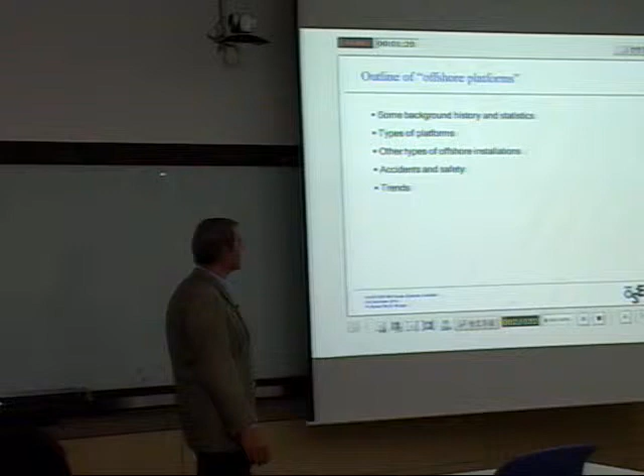I'll give you a little bit of background, and of course the driver - we often talk about driver, what's pushing the development - and the driver, of course, is the need for energy. So we'll have some statistics about energy and how that is evolving and how that is being projected for the future.

We're going to talk about types of platforms and other types of offshore installations. And as usual, I will focus on safety as a very, very important aspect, and a little bit about trends and the future.

So I think the oil history goes back to the 1850s and so on, when they found out it was possible to burn that black liquid that was found in the ground some places where it came up naturally. So the oil...

mainly started on land, but of course gradually moved towards shore. And for instance, in the Gulf of Mexico, very much of the oil deposits are associated with the Mississippi River Delta that goes far out into the ocean. So gradually one had to go into the sea in order to find more oil.

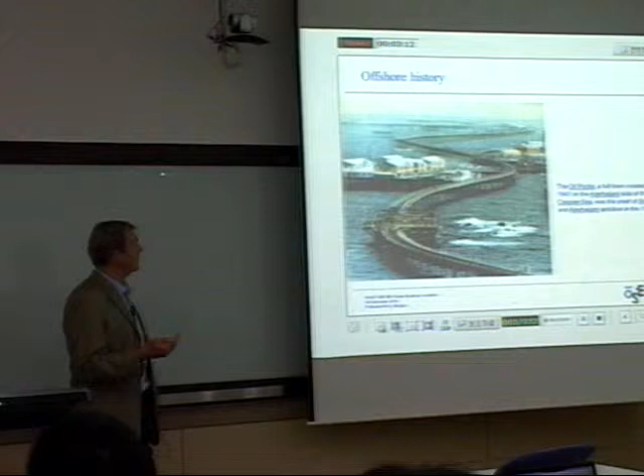And similarly, other places where the oil was very close to the surface, like in Azerbaijan and the oil capital Baku and so on, they gradually moved into the ocean to find the oil, but not very deep into the ground.

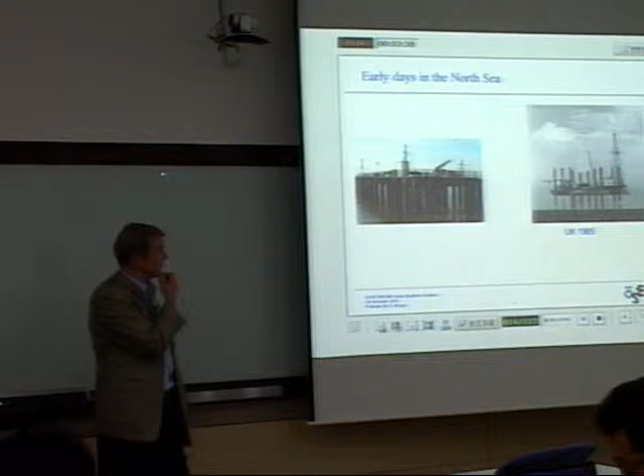And of course, in the Netherlands and the UK, the oil and gas history started in the North Sea. So very primitive platforms in those days, and typically in shallow waters, right? So when you have shallow waters, it's much easier to build structures.

And the challenge that we're going to talk about today and next week has very much to do with the challenge of going into the deep ocean.

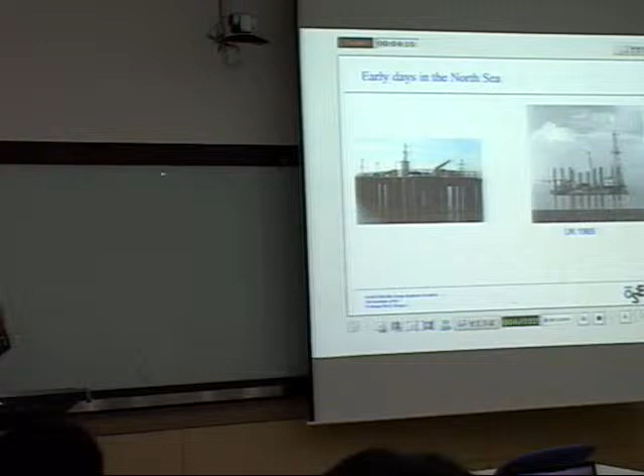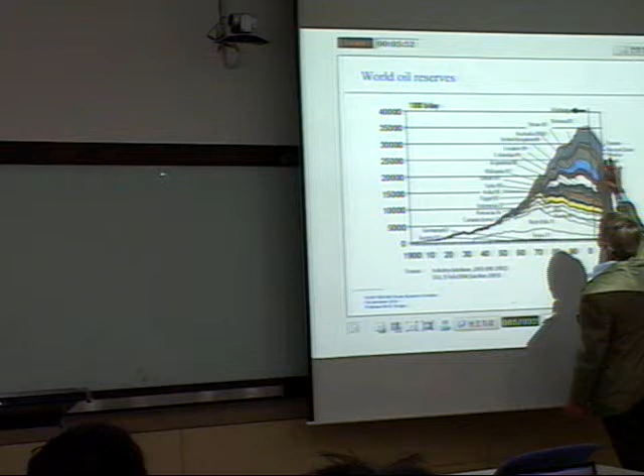Yemen, it should be - Oman, but of course the United Emirates and Saudi Arabia - it must be here. Saudi Arabia is low - where is Saudi Arabia? There is no Saudi Arabia.

Mexico, I don't know - that's a good observation. Texas, Alaska. Okay, well you have to - that's a good observation, so we have to figure that one out.

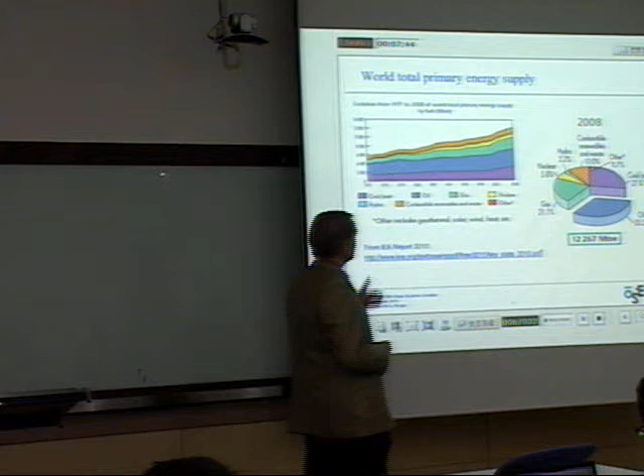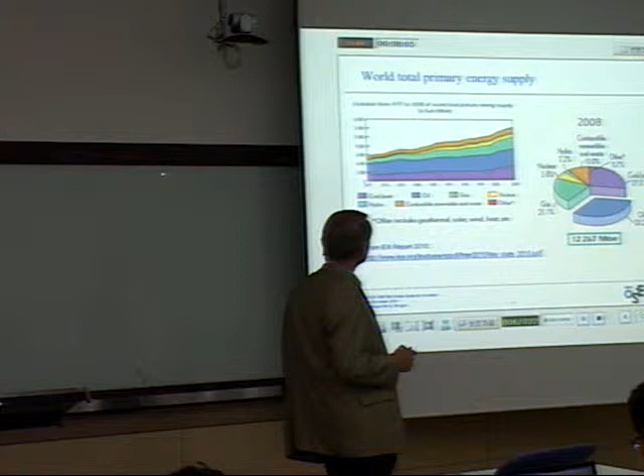But this graph shows the energy mix. If you look at the total energy supply - I should get my pointer - the total energy supply, and it's coal, hydro, oil, gas, nuclear, combustion, that's wood and waste. And you see oil is about 33% and gas 21%.

So oil and gas together is 54%. And then you have coal, which is the large piece of this cake, and nuclear less than 6%, and so on. This is typically firewood and that sort of thing.

And what is interesting also is that there is the renewables that are not wood, the other renewables, which is 0.7%. And what is that? Geothermal, solar, wind, heat, etc. 0.7%, that's as far as it's come.

Of course, there's a lot of attention to that topic of solar energy and wind and current and all that, but it really does not yet matter very much in the energy picture.

So what comes to my mind is, if we were able to be more efficient in our use of this and use less of it, the environmental effect of that would be much greater than what we at present can obtain here. So even with a 5 to 10% growth in that sector, it's still going to be very, very small for many years to come.

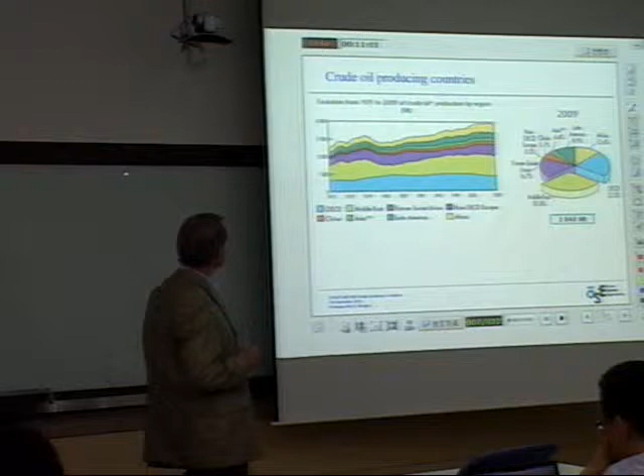Maybe you can convert that other graph to the same units as here, so this is million tons of crude, right? And here you see OECD countries going down, Middle East, former Soviet Union, etc. So Africa is increasing, right? So you see how that is shared more in detail for year 2009. This is very, very recent statistics.

Yes? What is the Organization of Economic... it is, let's say, the developed part of the world. So it's Europe, but I think Korea, for instance, is a member of OECD. And you can go into internet and see what countries are members of OECD. But it's essentially the developed countries.

Okay, and here you have it also with the crude oil. You see the main producers, but many of them use a lot of the oil themselves and don't export very much.

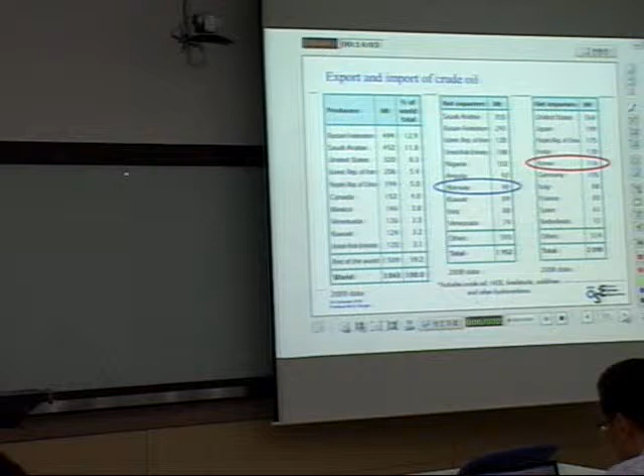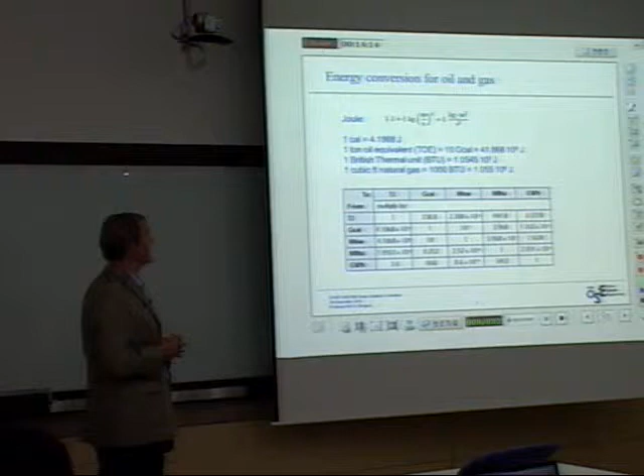And they are going to be even bigger. And since we very often meet statistics with different units, I made this one. Of course, in the SI system, we have very easy conversion of units, regardless whether it's energy or something else. So the basic energy unit is a joule, as you know.

And it's mass times velocity squared, and it's the same as also a watt second, right? A joule is 1 watt second, so it's very easy to convert let's say, the thermal energy in fuel into other units, and look at the equivalence.

And 1 ton oil equivalent you can convert into, it's defined as 10 gigacalories, which is this many joule. A BTU is often used, British thermal unit, and you see this figure. And a cubic foot natural gas. Sometimes we see cubic foot and sometimes we see cubic meter, and of course it's not difficult to convert from a cubic foot to a cubic meter, and there you have also the caloric or the thermal energy content. So I'm sure some of you will be working on energy in your student projects, and this kind of conversion is good to have.

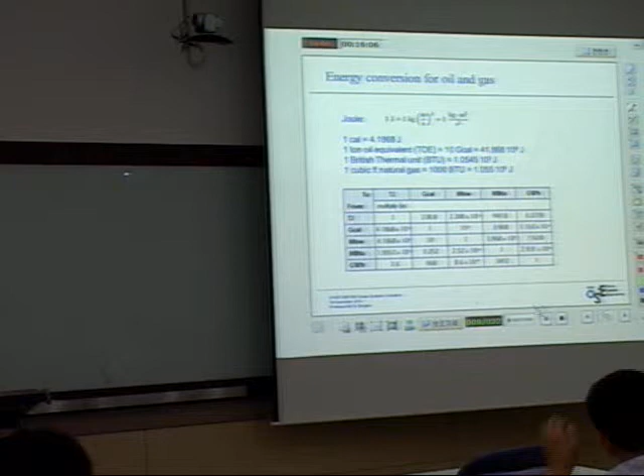Natural gas producing countries, Middle East, former Soviet Union, here you see, and this, like the graph on oil, there was a kind of a kink from 2008 to 2009. Of course, some of that may be due to the financial crisis, right? But it also is an indication that we are peaking totally when it comes to oil as well as gas.

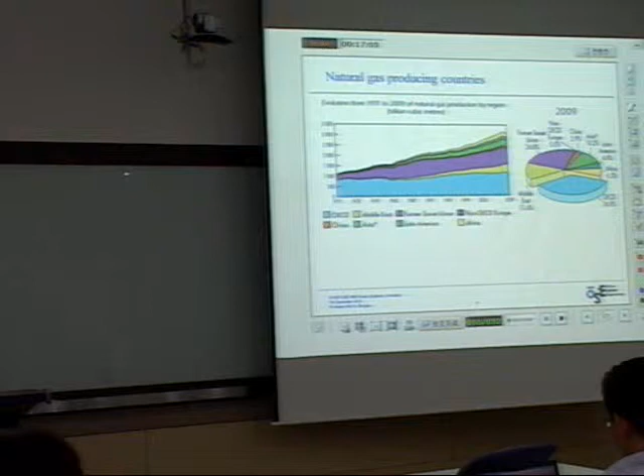Yes, sir. Is there any other producing countries, natural gas producing countries, except for Qatar? Well, there are many. Here you have it, so I anticipated your question, right? You have producers, net exporters and net importers, right? Here you have the big producing countries, right?

So Russia is certainly the biggest by far as an exporter, because the United States, of course, uses most of this gas itself. I think they send some gas maybe to... No, they are not. They are not on the exporting side at all. US gets much of its gas from Canada and from Mexico.

But as you see, little Norway is the second largest gas exporter in the world, and we almost export all of it, right? Because we have hydropower. So Japan is the biggest importer. But again, I'm surprised not to see China on this importer graph. But I think they'll be there very, very soon.

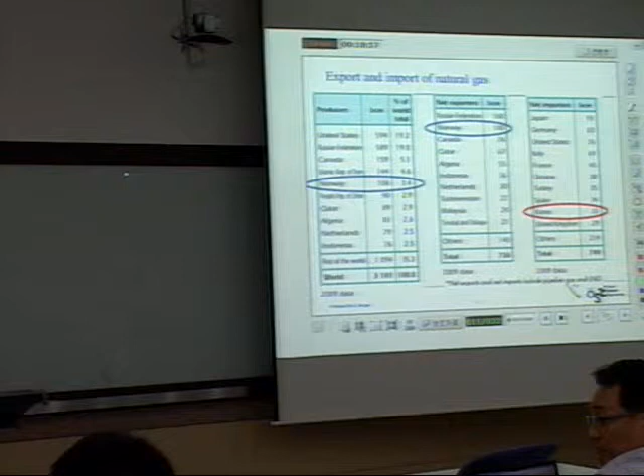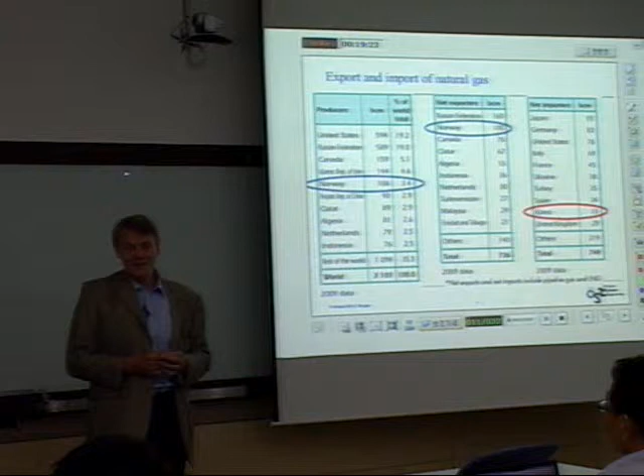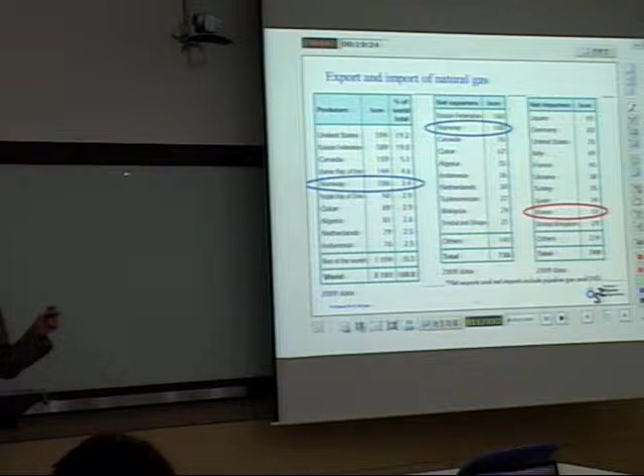Yeah, we have 106 billion cubic meters of gas produced, and we export 100. So we use very little, and that's mainly for the chemical industry. We don't use gas for heating or anything like that. But we start using it for ferries, and I think I mentioned to you establishing the distribution system for LNG, because we produce LNG as well as export in pipelines, right?

Of electricity, 98.5% comes from hydropower. It's a very unique situation. We are blessed. We are blessed.

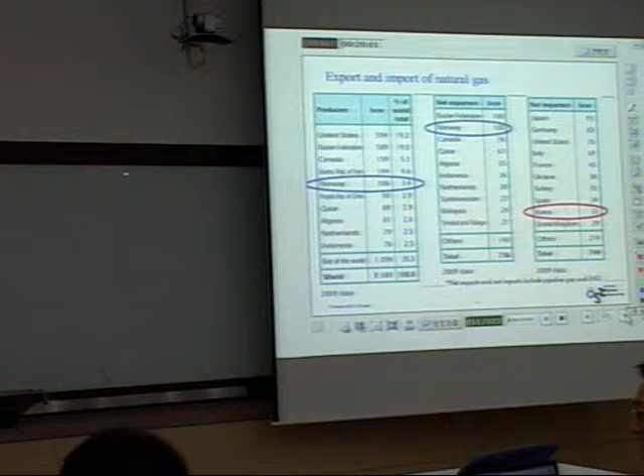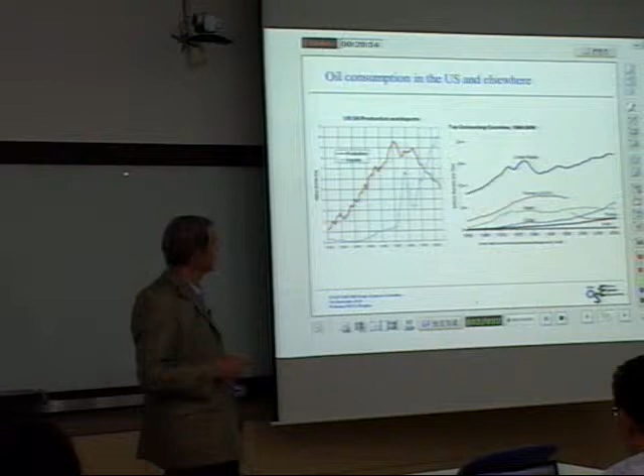This was the oil crisis in the 70s. Look at China, this is something that is worrying the international community. Of course there are so many people and the standard of living goes up, so it can be expected, but that strongly influences the international price of oil.

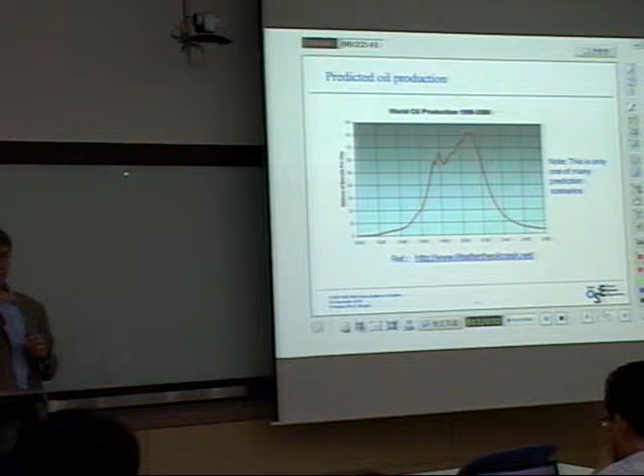But why is that? Of course there are more efficient production methods, so one can get more out of the reservoirs, and there are new reservoirs being found. Some are shut down, but more has been found and put into production. But now we are reaching peak. So even though before we had all these predictions that the end is near, so to speak, now it's going to happen.

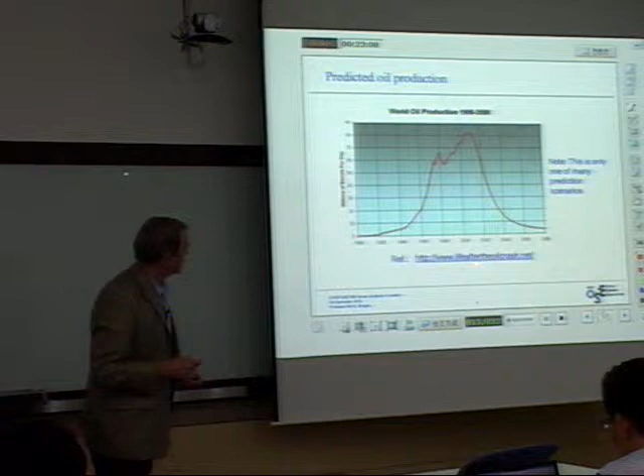I don't think it's going to be as dramatic as you see on this. This is a site that's called lifeaftertheoilcrash.net - Life After Oil Crash. But, some comments - that's really what I was showing here.

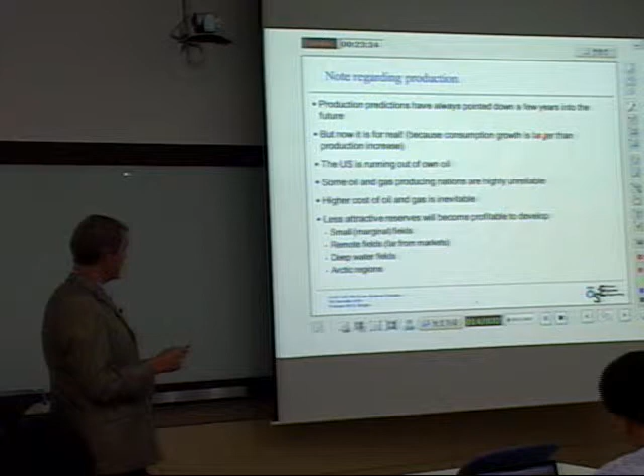Production predictions have always pointed down after a few years into the future. Now it's for real, because consumption growth is larger than the production increase. It is real, the US is running out of oil. That we saw from the diagrams, right?

Some oil and gas producing nations are highly unreliable. You know what happened in Europe, for instance? We had a crisis with gas delivery because of some disputes in East Europe, and the Russians shut down the pipelines supplying West Europe with gas. So, and of course there may be conflicts that could influence this too.

So higher cost of oil and gas is inevitable, I'm quite sure about it. We are now around $80 per barrel of oil, and it's going to go up. For a short time it was up to 100, and what was it, 125? Then it went down again, but that was a couple of years ago.

But oil and gas is going to be more expensive. And one can say one positive side of increasing oil and gas prices is that it becomes economically feasible and profitable to develop the smaller reservoirs, going deeper into the ocean where the production cost is much higher. So if the market price is high, one can also afford developing fields that are more expensive. So in one way, the price is a driver for being able to produce more.

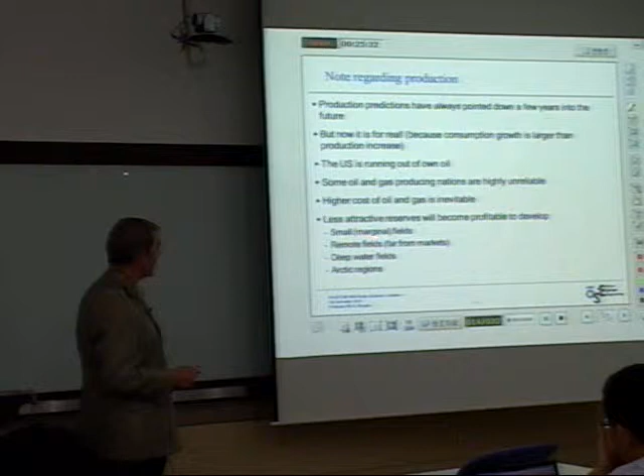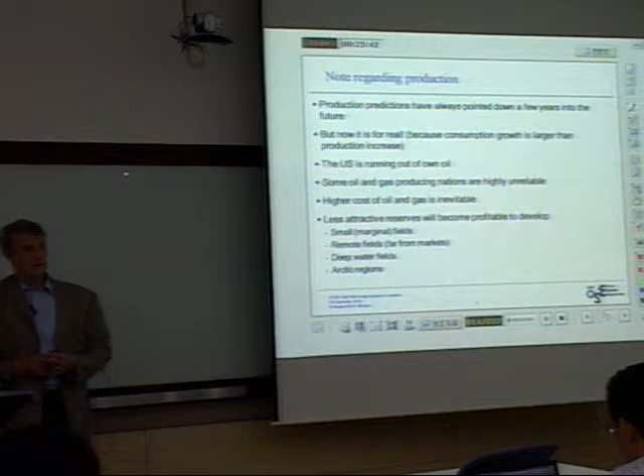So for instance, small fields, very often referred to as marginal fields, remote fields far from markets, deep water fields, and of course Arctic regions. Some estimates now say that about 25% of the remaining reserves of hydrocarbons, oil and gas, are to be found in Arctic regions.

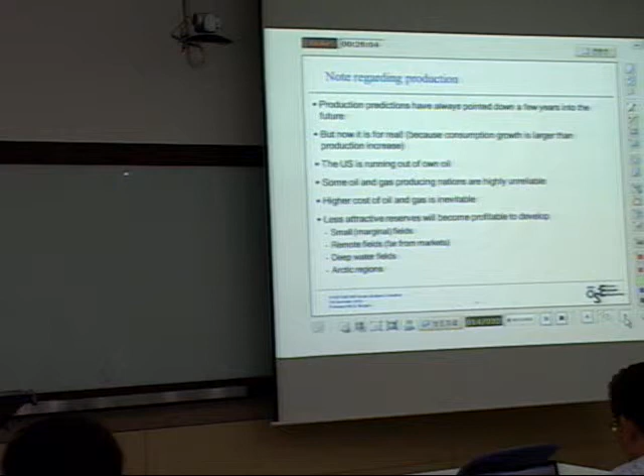So as we saw from some previous statistics, oil and gas stands for 54% of the world energy production. About 30% of the oil and gas production takes place offshore, so this is already very, very big. It's estimated that 50% of undiscovered oil and gas is lying offshore. That's because initially one did this on land, and the reserves on land are being fully exploited, right? There's less left there. So the share of reserves not yet produced is increasing, and it's estimated now that 50% of the remaining oil and gas is offshore.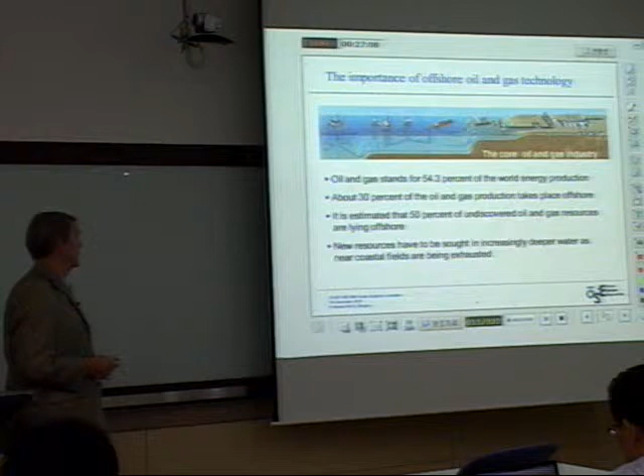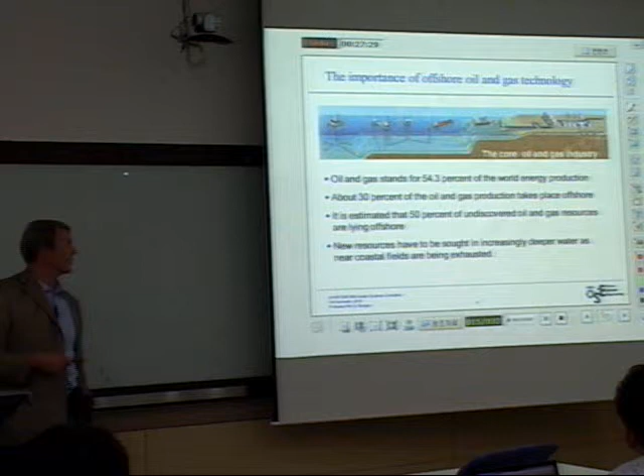So it's quite clear this is going to be very, very important, not least because it's so necessary for modern societies to have oil and gas, right? And we have to go into deeper water, deeper and deeper. So we're going to get into different types of platforms, and today we are mainly going to talk about fixed platforms, and this is a space frame structure, often referred to as a jacket platform. That is the terminology used in the oil and gas industry.

Jacket platform. If you use Google and look up jacket, what you mainly find is new concepts in jackets. You find this. But anyway, that's what it is.

Then there is the compliant tower. That is for very deep waters, and that is when you realize the structure will have large deformations - you kind of let it have large deformations. Here you see the main members of the structure standing like this to make it stiff in the transverse, horizontal direction. Here you see it's like this, and it will have larger deformations. But one can put equipment on board that will allow that.

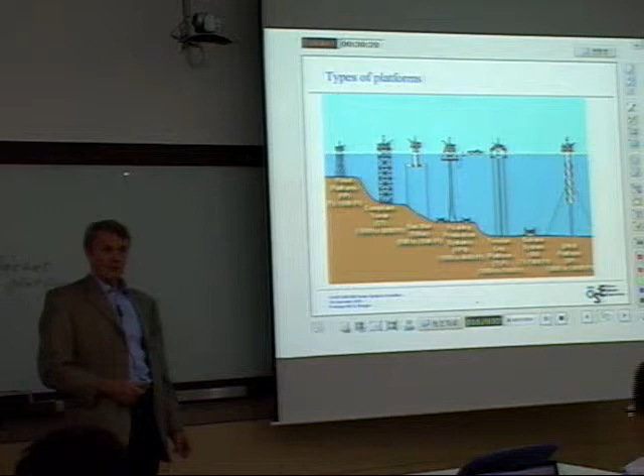Then we have also a tension leg platform, a different type than that. Subsea systems are systems standing on the seafloor. And then there are different types of deep buoys. A buoy can be just a plastic bubble or ball used for tying up your yacht, for instance, but this is a deep buoy, a deep floater. There are many different types, and we're going to look at some of these.

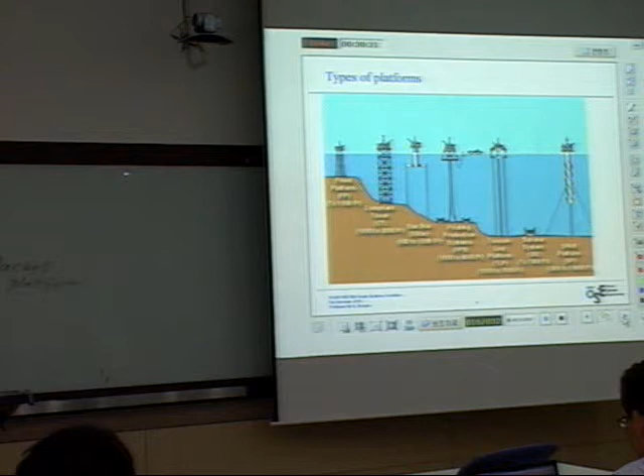Here you see jacket, compliant tower, also a TLP. Here you see also a TLP - different. Do you see the difference between these two? Here you have a very small water plane area. Here you have a larger water plane area.

Here you have a semi-submersible floating production unit. Spar, truss spar, another spar - so there are many variations. FPSO - we'll talk about floating production, storage and offloading. But this is also semi-submersible, half submerged into the water.

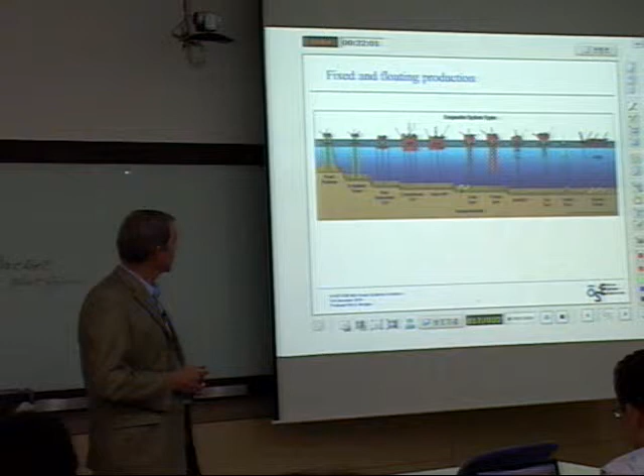FPSO, what is this, a buoy? Yeah, this can be, let's say, a weather observing buoy. It could be a military buoy. This is a buoy, right? This is a deep buoy that's often referred to as a spar. So there is certain terminology used in this industry that you have to get used to.

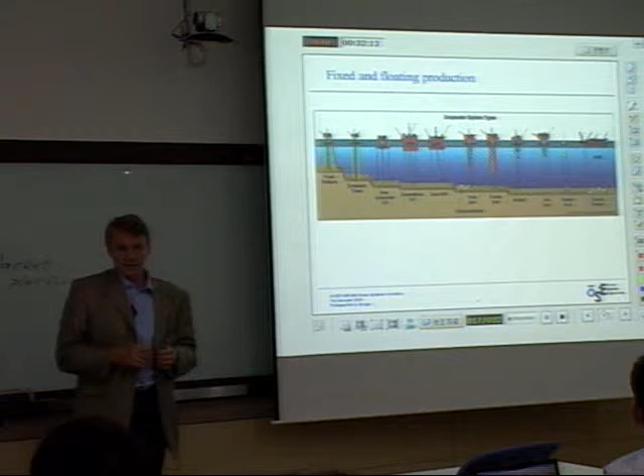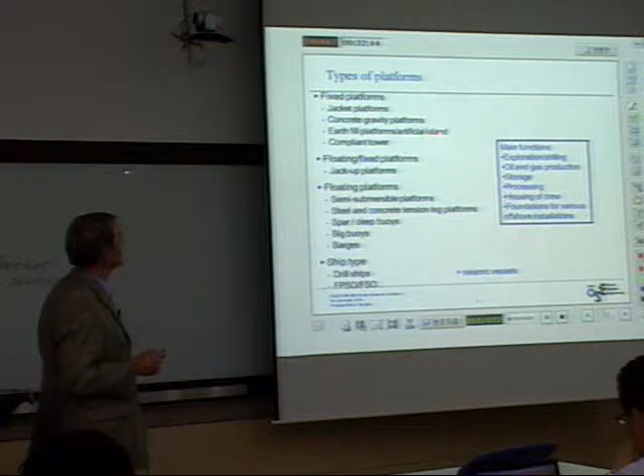So here you have it: you have fixed platforms - they are attached to the seafloor. Jackets, right, we talked about jacket platforms. Concrete gravity platform, and obviously a gravity platform is a very heavy platform, and it stands in place because of its weight. Earth-filled platforms, artificial islands, you find particularly in the Arctic. Compliant tower we talked about.

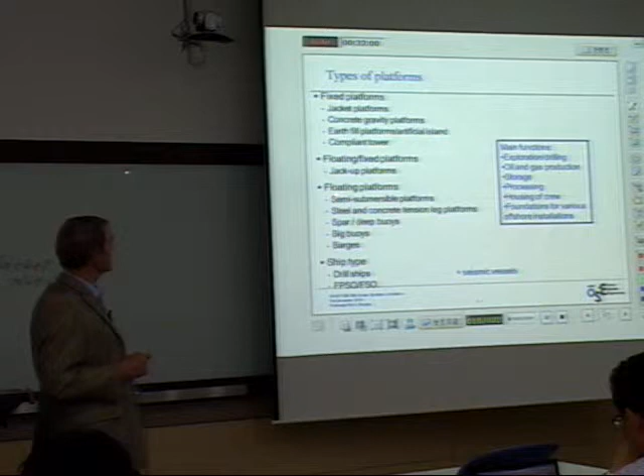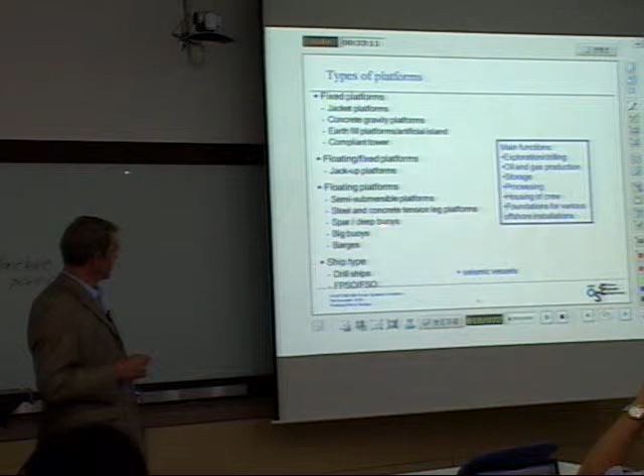Floating platforms that are both floating and can be fixed - jack-ups, we'll look at that too. Semi-submersible platforms, steel and concrete, tension leg platforms (TLPs), spar, deep buoys, big buoys, barges, and there are ship-type structures too, for drilling and for production and storage.

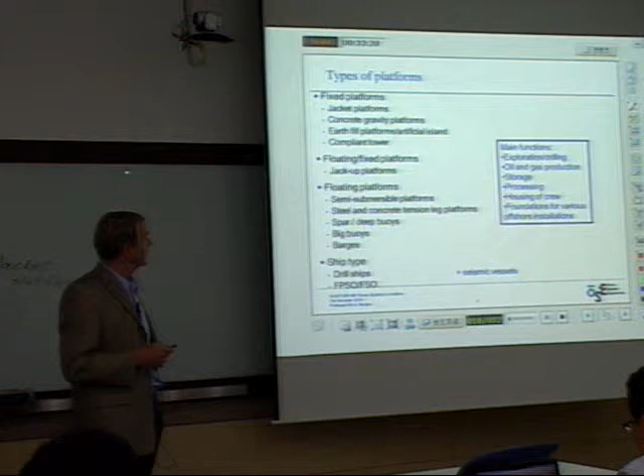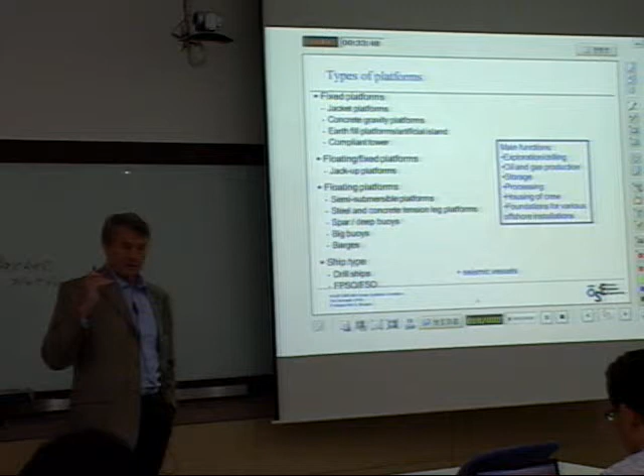So main functions: exploration, drilling, looking for oil reservoirs. It's the production, it's the storage function - you store oil on board. Processing is very important also. Nowadays we are talking about offshore processing of LNG, making floating LNG plants. Housing, of course, and foundations for various offshore installations.

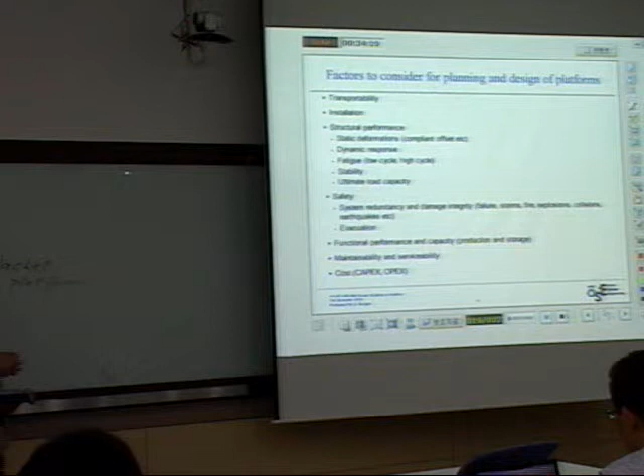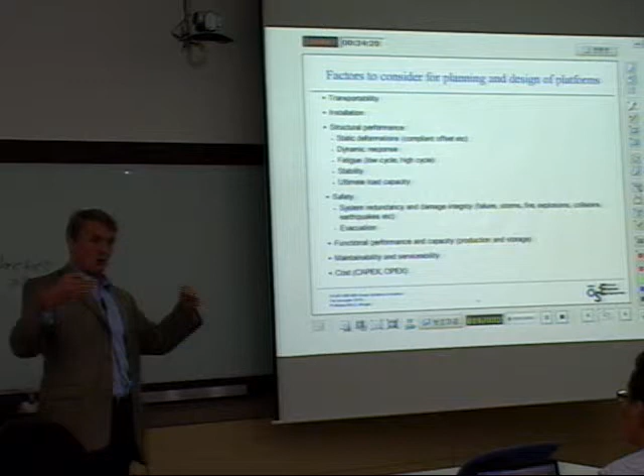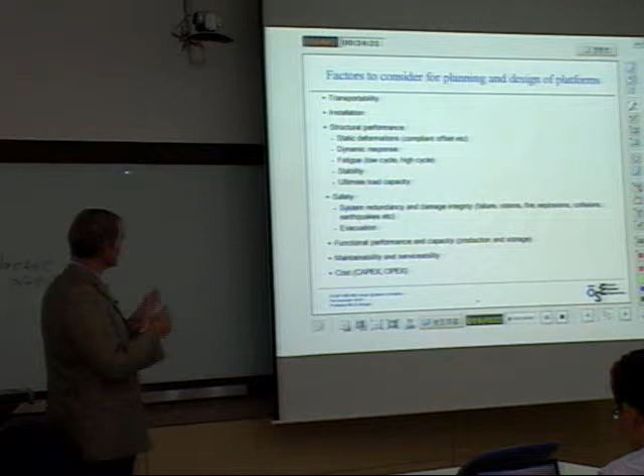So if we are to work in this field, there are many things we have to consider. If you are working on innovation concepts for offshore platforms, what do you have to think about? Well, of course, you have to think about whether it's possible to build. And then there's the transportation phase - it has to be stable in transportation, feasible to move it, and feasible also to install it.

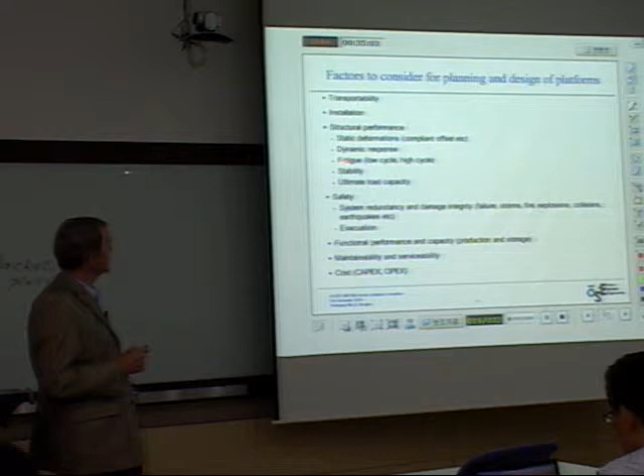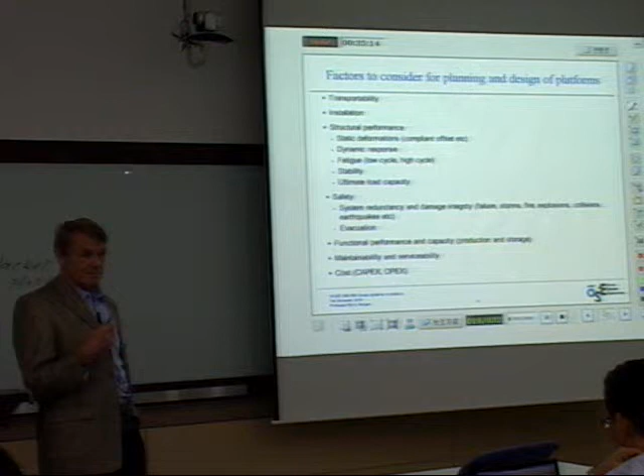Then we have to look at structural performance, static deformations, dynamic response, vibrations, and then what's happening with the material in terms of fatigue. We're talking about low cycle fatigue, when maybe you have a few thousand cycles but with plastic development. If you really go into the plastic zone, steel will typically not be able to take very many cycles. Then we have high cycle fatigue, and because the loading is wave loading, we can reach into the millions of cycles for a structure during its lifetime.

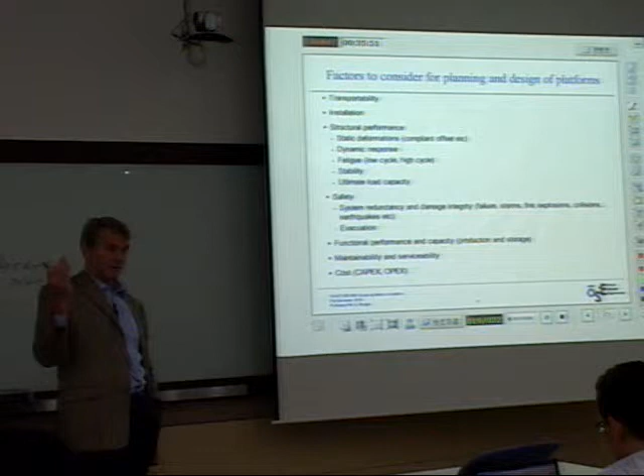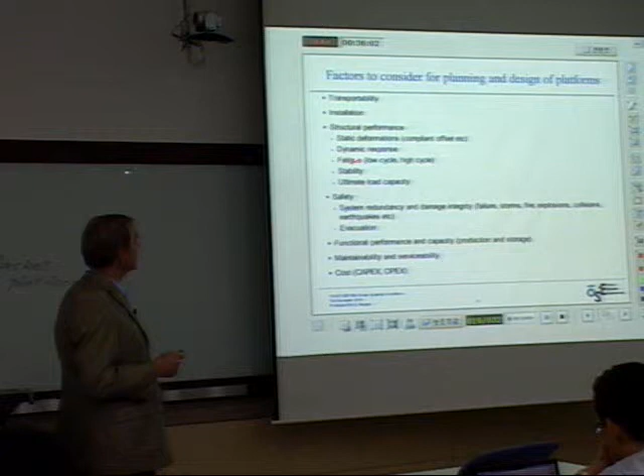If you think of a wave period of a few seconds, and the structure is going to last for 30, 40, maybe 50 years, you get into the millions of cycles. So fatigue is maybe the most challenging design condition for an offshore platform.

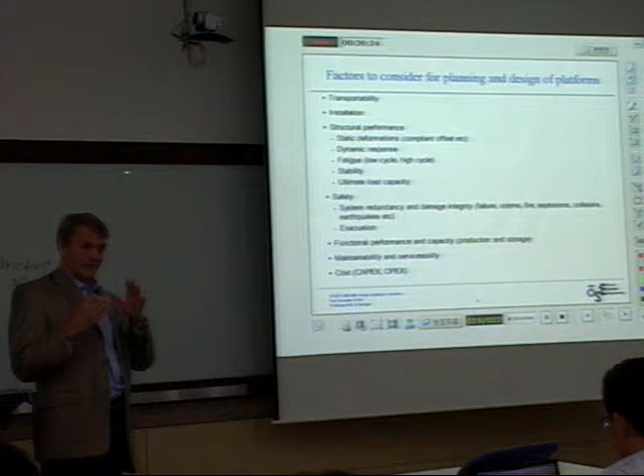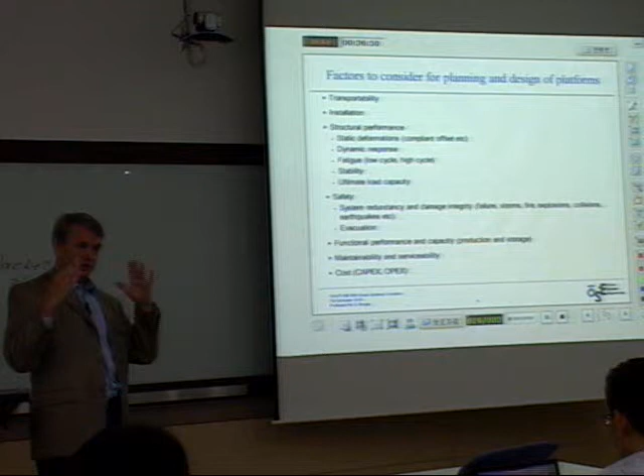Stability and ultimate load capacity. Safety - what is the system redundancy? That is, if one part of the structure fails, will the whole structure collapse? That's called redundancy. If you've had structural mechanics and statics, you know what a redundant system is - that's when the force distribution depends on the relative deformations, because the forces can go many ways. In one way that's an advantage: if a structure has one member failing, you can redistribute the forces within the structure, and that's what we call redundancy.

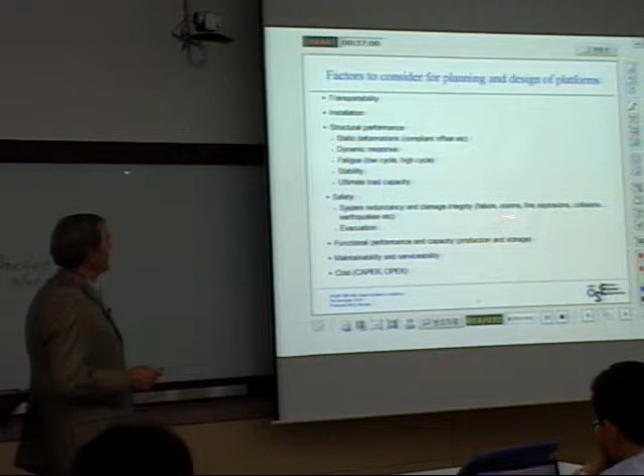So there are extreme conditions you have to consider - some sort of failure associated with storms, fire, explosions, collisions, earthquakes. And in the safety context, of course, also evacuation.

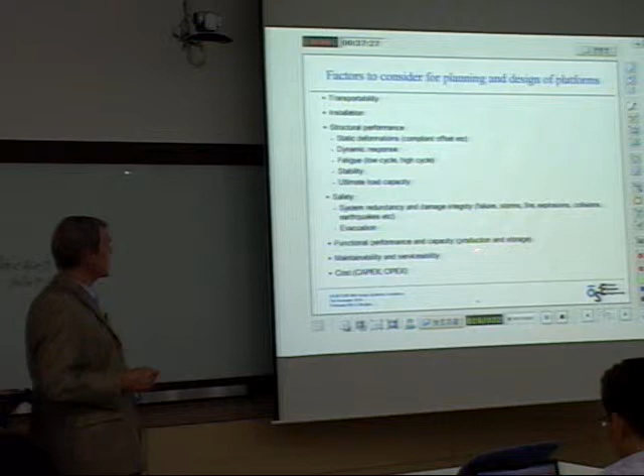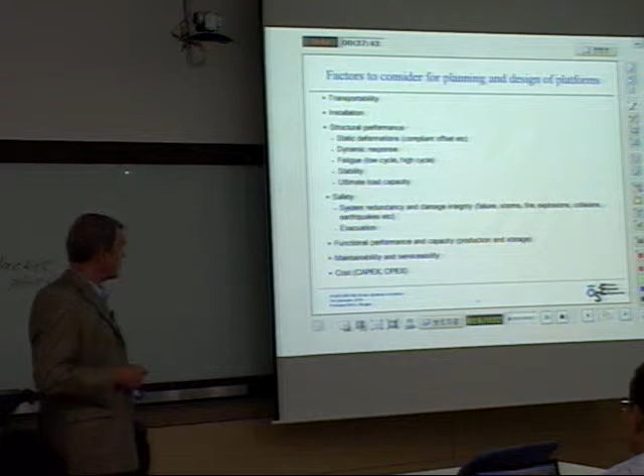Then altogether there's functional performance and capacity - the production capacity, the storage capacity, and what is called maintainability: how easy is it to maintain, far out in the ocean, deep into the water, and service altogether. And of course, it's the economical part of it as well.

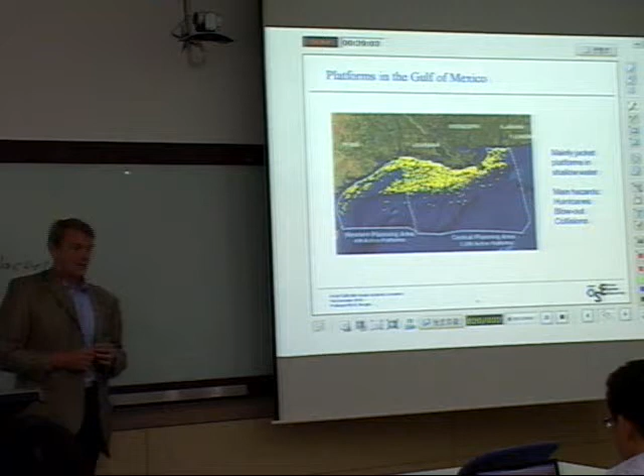So this is a big industry, and the main hazards are hurricanes. Some of these hurricanes have created a lot of damage - some platforms have toppled, gone over, and failed during hurricanes. And of course, one can also worry about collisions when you see how many platforms there are.

So a little bit more about the more specific platform types. Jackets are the majority of platforms today, 80 to 90%. Typically we have tubular steel members, tubes - the main legs are often referred to as chords - and then you have the cross members to stiffen the structure. A structure may contain many hundreds of members, complicated joints. Look at this.

Obviously it takes experience and special competence to build this kind of structure. And the main concern is not only to be able to build it, but to design it in such a way that you don't get fatigue problems. So the joints are particularly critical.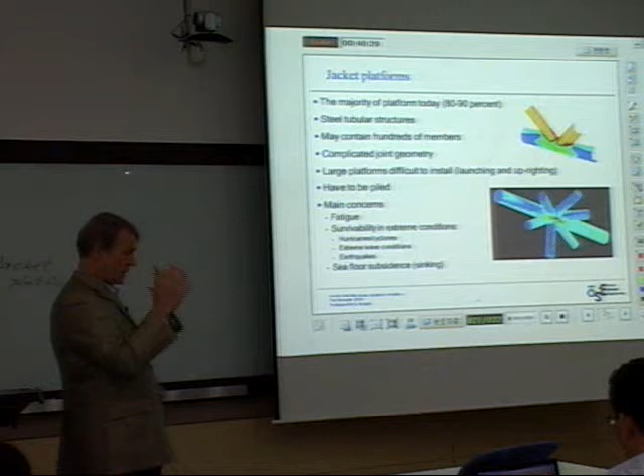Large platforms are difficult to install - that is launching and uprighting, I'll explain what that is. Then they have to be piled - you know, to be able to stand in one place, you have to pile into the ground. And fatigue is the number one concern in a design context.

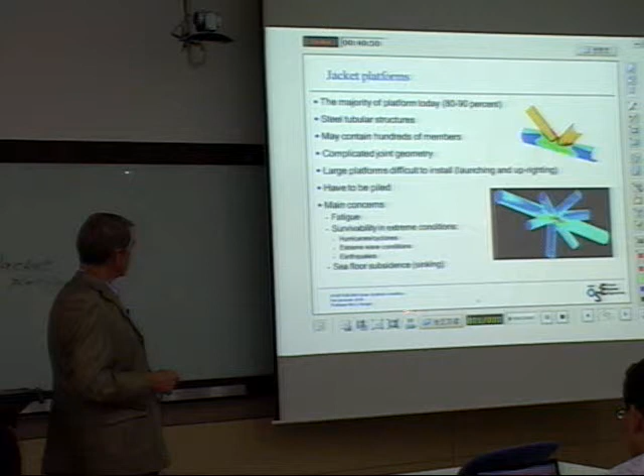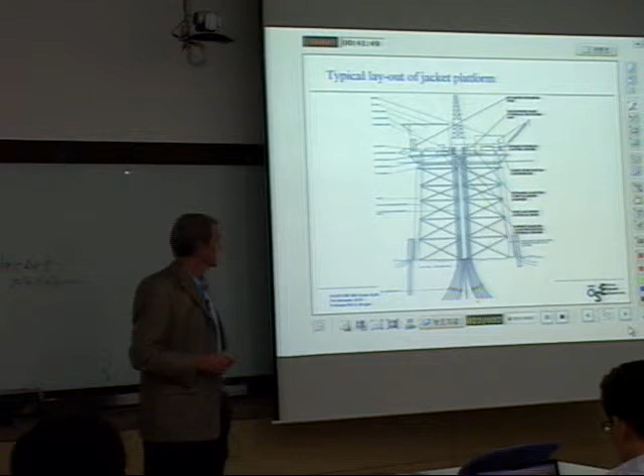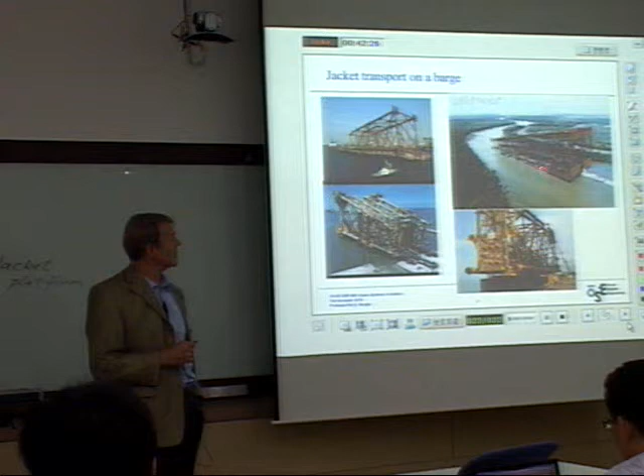This should give you a feeling of how big these platforms can be. There are fixed platforms, I think, down to about 500 meters. Look at this, it's enormous. And I've seen another picture - I wasn't able to find it now - but I've seen another picture, I think probably of this platform, with a 5-story building next to it. It looks like a tiny little thing compared to the platform.

This is what's called offshore operations, and during this operation you have to put it down in the right place. First it's like this, and then you can ballast it so it goes down. But in that operation, you have several tugboats that keep it in position with GPS, etc. That's what's called dynamic positioning, and they can set it down within centimeters of where they want it.

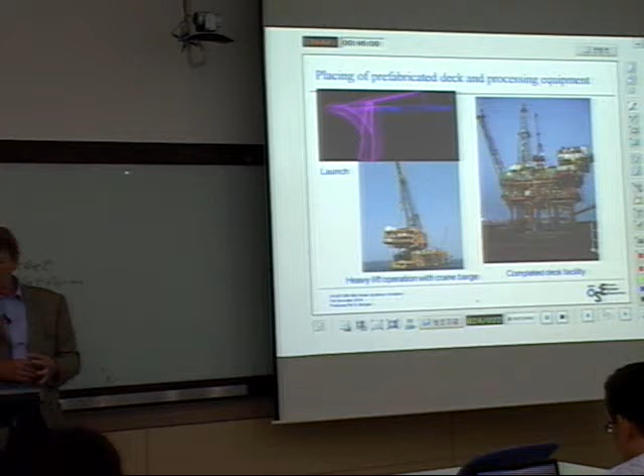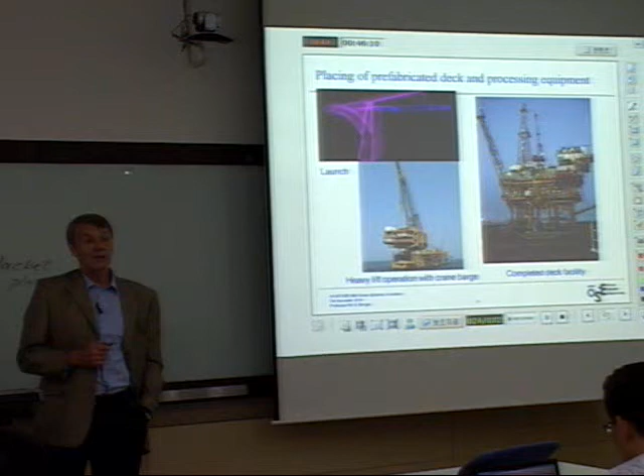So it's to find the motion and also to do the proper analysis of when you see how much, for instance, the floating elements are submerged - then you have to do a proper design. I think if you search the internet - I didn't include it here - but you can find some videos showing this launching process.

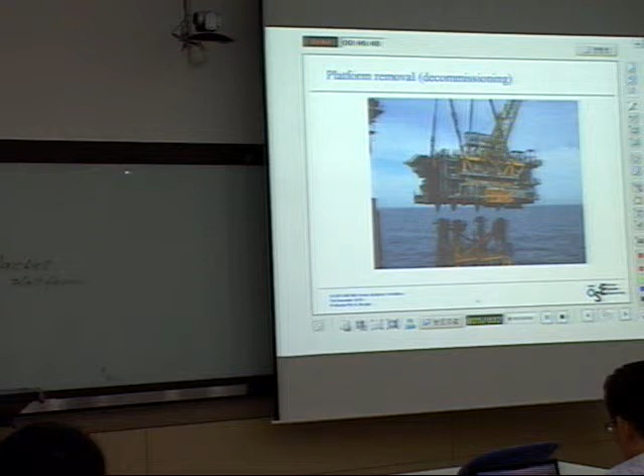When the platforms become old and there's no more oil, they have to be dismantled. So you have big operations also to remove the platforms. And of course, in the future, very many platforms will have to be removed, thinking for instance of the Mexican Gulf, where there are thousands of platforms. They will have to be removed.

Then we're talking about gravity platforms. I'm just wondering, I'm now at slide 26. Are you in a hurry? Do you have 5 more minutes? Okay.

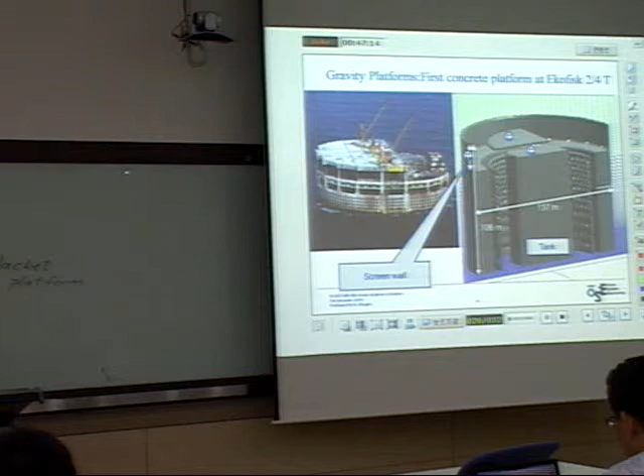This is concrete platforms, and this was the first concrete platform built in the North Sea, on the Ekofisk field. Construction started in '72, '73, and it was planned for both production and storage of oil. Later on they had to build an extra wall around it, so it was added, and now it's mainly used as a base for other platforms in the neighborhood.

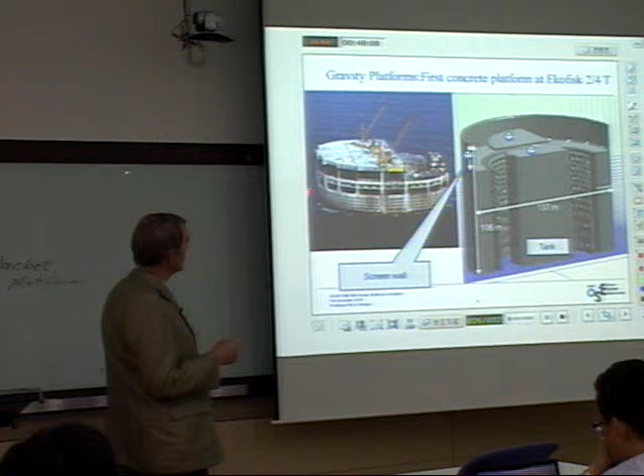I remember discussions regarding this platform, because they added an outer wall, perforated, to protect the inner part. But of course when you have an outer wall, you also increase the diameter of the entire platform, so the total inflow of current and waves is increased by the protection wall. So there was discussion whether it's smart to have a large water area, maybe for stability, as opposed to having a smaller one where you get smaller forces.

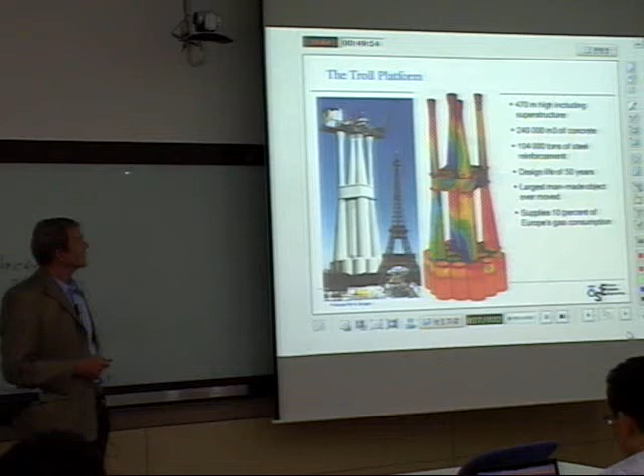But the thing is, nobody has seen this one, right? No, nobody has seen it. Well, somebody has seen it from the inside, but not from the outside, because it's built on water. Very interesting to do finite element analysis with millions of degrees of freedom. It supplies 10% of Europe's gas consumption - it's a very important platform. So it was expensive, but it is serving extremely well.

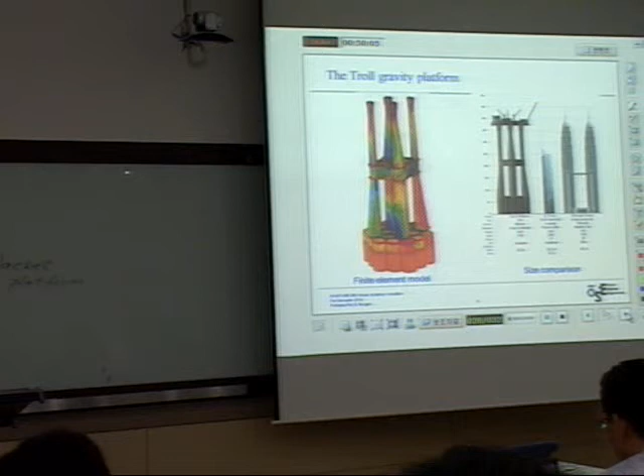This is some other comparison of size. This is very briefly how they are built. First you build the lower part in a dry dock, then you float it out - this is what's called the caisson part, the lower part. They are essentially connected cylindrical shells, and here you see the capping on top of it.

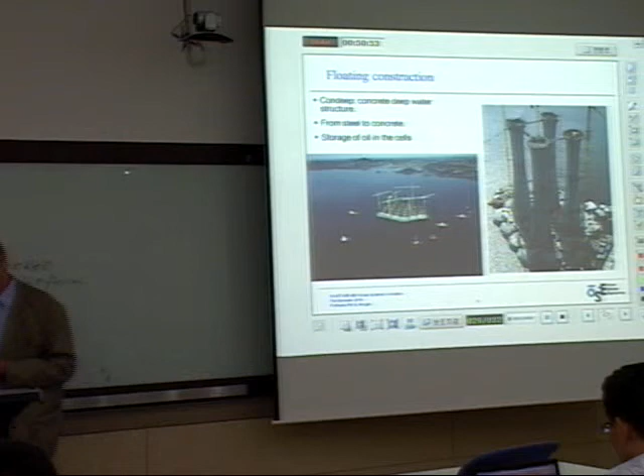So it's a spherical shell on top of a cylindrical shell, and then you have these shafts, extensions of these cylinders going up to support the platform deck. It's built floating on water, and that's why nobody has seen the entire platform at one time, because it's always been on water during construction, except for the very base in the dry dock.

Here you see some more pictures. And of course the critical phase is when you bring in the deck - prefabricated, with all the processing on board - and this is put on top of that. So now the platform is 300 meters underwater here, with just a small 10 meters going up here, and you put this, I'm not sure, 30,000 ton deck on top of it.

And that's the advantage of a concrete platform - you can put the deck on top of it while you are lying here in the fjord. This is a deep fjord in Norway. So you can put the deck on top and then take the whole thing out to location.

And that's what you see here - you see all these tugboats? There are actually some tugboats pulling in the opposite direction too. I think there were 11 tugboats to take it out. It's enormous - that's a big operation.

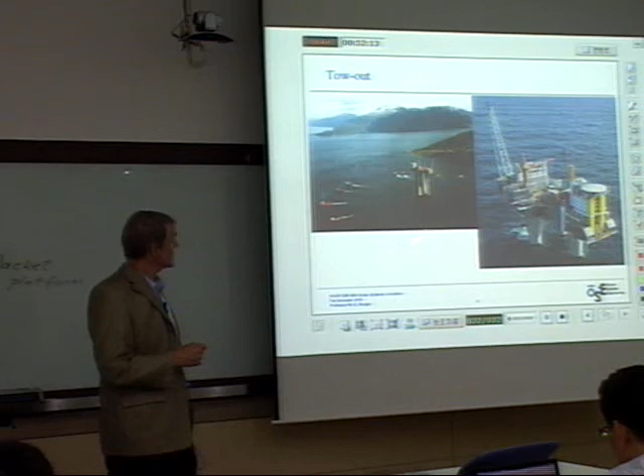So that was the last one I think I have today. It's said to be the world's largest man-made movable object, bigger than the ULCCs, etc. Quite an engineering feat, and this shows, if you have the theory in order - if you know enough about the ocean climate, enough about materials, enough about structural design - you can do things like that.

That certainly at one time was a first, right? You had to - since this cost maybe $1 billion - be sure that you have done everything right. So that is really innovation in practice. Okay.